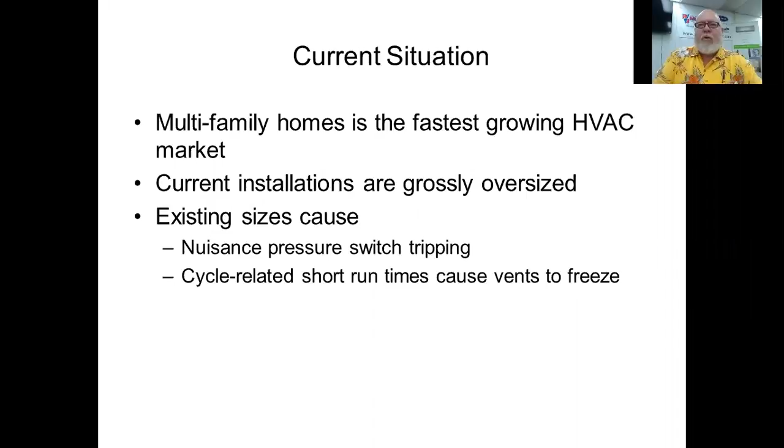But we discovered that the 40,000 BTU furnaces that used to be the smallest ones in our product line are actually much too large for these applications. In some instances, they're more than twice the capacity that is needed to effectively heat the homes at design temperatures outdoors. So we get nuisance pressure tripping and short run times due to the oversizing issue.

So Carrier has developed and now is producing a low capacity gas furnace, they call it. The furnace has a 26,000 BTU input and it comes in two models. The less expensive version is a 1/4 horse PSC motor on the blower. And the more expensive version, which also is electrically a little more efficient, is a 1/3 horsepower with the multi-tap ECM blower motor. That's the one I'm sure you'll recall that has the 24-volt input to determine the RPM of the blower motor. And these are intended to serve for new construction in apartments and multifamily dwellings and also the growing popularity of low-energy homes.

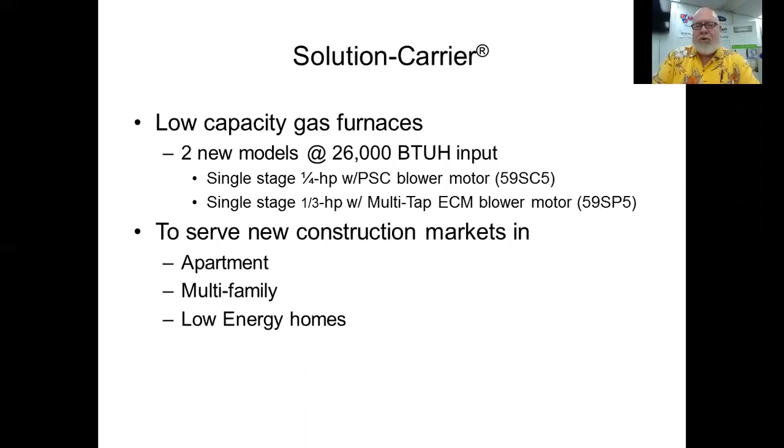So these are the specifications on the furnaces. You'll notice the one on the left has the 1/4 horse PSC blower motor, and the one on the right has the multi-tap ECM. They both have 2 burners, 2 heat exchanger cells, and 13,000 BTUs per burner. The cabinet width is the exact same width as our current 40,000 BTU furnace, and the height is exactly the same also. So the footprint is the same.

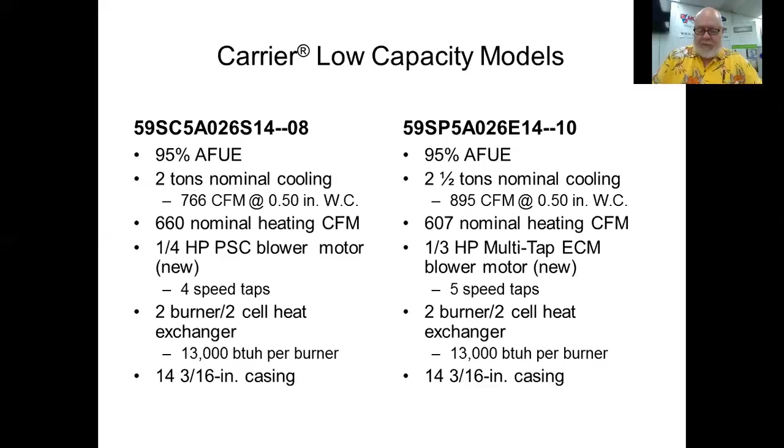The Payne version is identical to the Carrier PSC version. It's just branded differently and as you know, marketed differently.

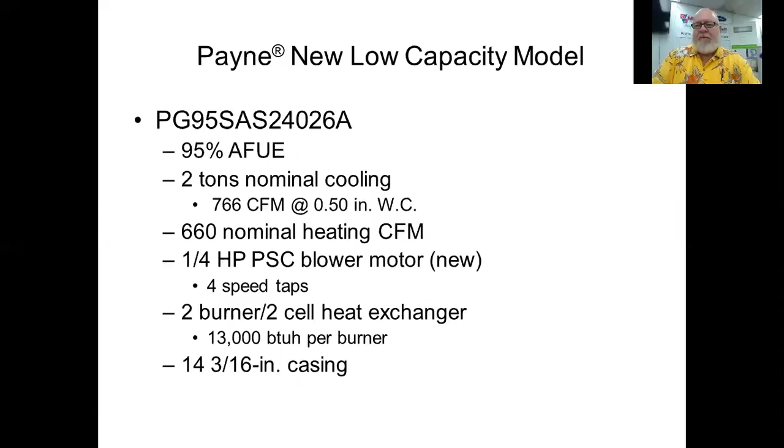Now the major differences from the current 40,000 BTU unit is they didn't just downgrade the burners. The Inducer has a different design. They've added an intake choke on it. We'll see that in the upcoming slides. The pressure switches have slightly different set points, and we're lowering the manifold gas pressures in both natural and LP with dedicated conversion kits.

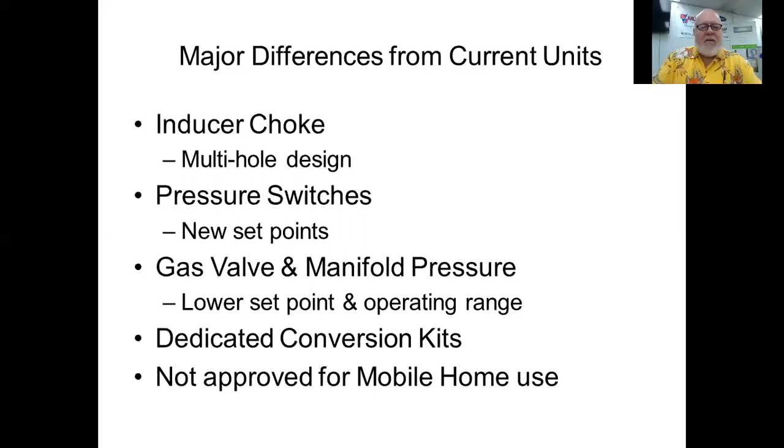Notice the inlet choke. The Inducer you're used to looking at has 1 large round hole. Now we've downsized it so there's only 3 holes to regulate the volume of flue gas that the Inducer will handle. Those are 3/8 inch ID holes in the choke. If you need to buy a replacement Inducer, it comes as a single stage unit and it includes the choke. You don't have to alter it in any way.

Now the outlet choke issue, you may remember the 40,000 furnace. If you have a flue vent that is 10 equivalent feet or less, you need to install the outlet choke. That does not apply to this furnace, so don't attempt to do that.

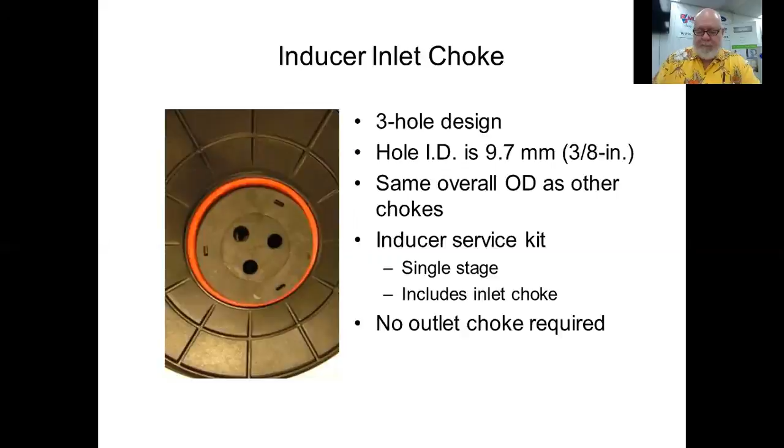The pressure switches, although they look identical to the ones on the larger furnaces in the product line, they're different. They have different make and break points, so don't confuse them. As you may be well aware, for example, the one facing the rear, which is the housing pressure switch, on the larger furnaces, that breaks at 0.35 inches negative. This one breaks at negative 0.10. That essentially is the point at which the furnace, if allowed to run in that condition long enough, will start to make carbon monoxide. So the research has shown us what break point is appropriate.

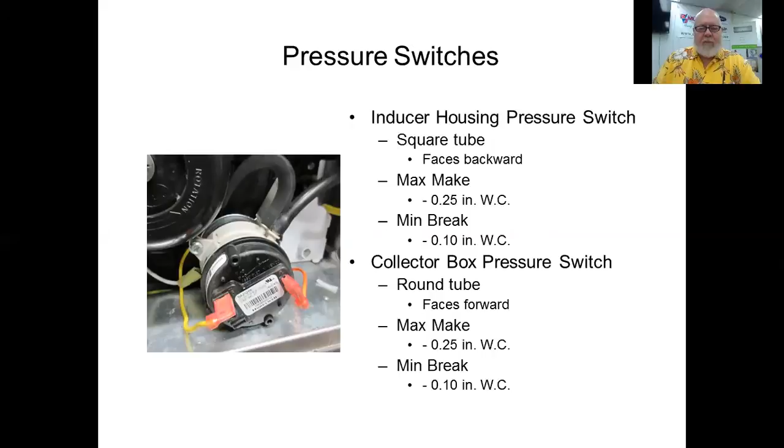The collector box pressure switch is the one in the front with the round tube, and that also has a lower break point than the previous ones you're used to. Here's another large difference is the gas valve has a special regulator, and you can tell by the green label you'll see on it. It's staring right at you when you take the door off the unit. And it also conveniently located has a nominal 1.5 inches water column manifold pressure setting that you should expect. Again, starting these units up, I would strongly recommend that you verify that with your manometer before you walk away from the job.

The furnace also uses a lower propane manifold pressure instead of 11 inches that we're used to. This furnace requires 5.5 inches water column. And again, we're expecting you will verify that before you leave the job.

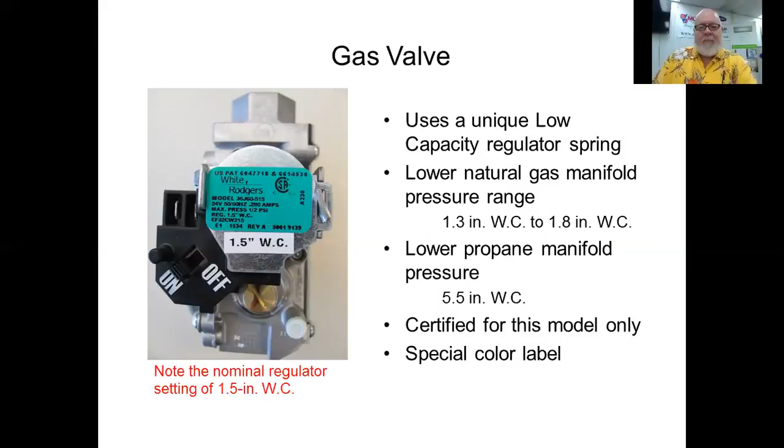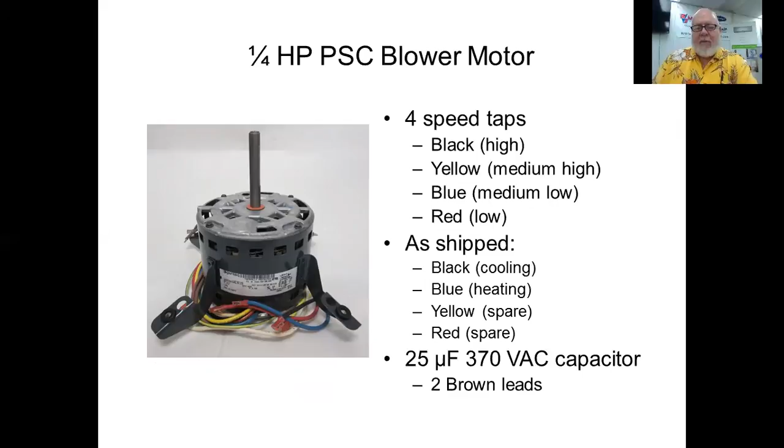The blower motor, this is a familiar device, the 1/4 horse PSC motor. It's 4 speeds. The speed taps are denoted by the colors of the wires. And as the furnace is shipped, the factory puts the black high-speed tap on the cooling speed, and the heating speed utilizes blue, which is medium-low. It uses a 25 microfarad at 370 volt capacitor.

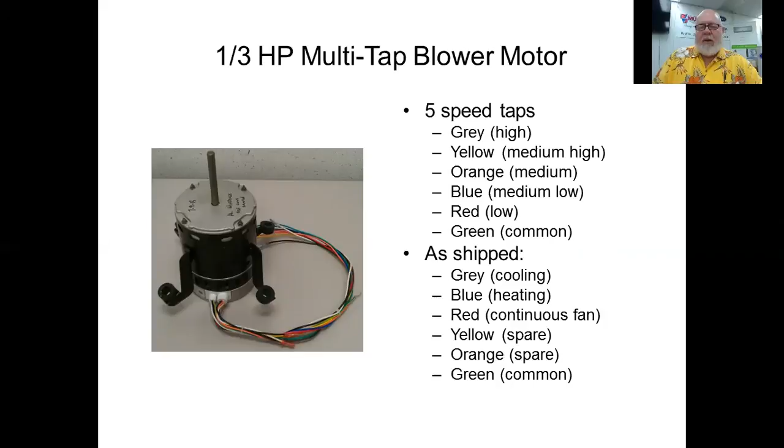The multi-tap blower has line voltage going to it at all times. There's a black and a white wire going into the module. That's line voltage. It's, again, at all times when the furnace is powered up, there's 120 volts there. And the speed taps utilize a 24 volt signal to tell the motor what speed range it's supposed to be running at. The wire speeds are denoted by the colors, and again, as shipped, gray is cooling and blue is heating and red is continuous fan.

Venting is the same as the larger furnaces. You have 3 options. You can do it as a 2-pipe direct vent. You can do single pipe non-direct vent as long as you have enough ventilation air in the combustion space. Or you can do 2 pipes with 1 pipe vented outdoors and the other combustion air pipe terminating in a ventilated combustion air space, such as a ventilated crawl space or a ventilated attic.

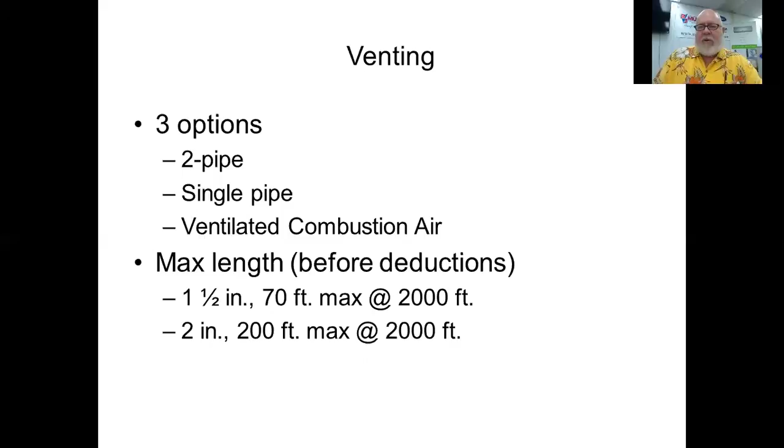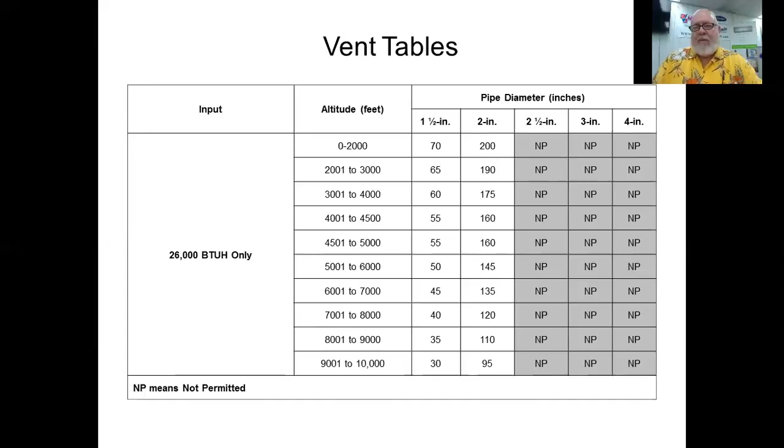The maximum length before the deductions for elbows is as listed below, and we'll look at the venting table on an upcoming slide. And here it is. You'll notice that the only 2 sizes that are allowed are 1.5 and 2 inch. That means that if you have an existing application where someone has installed 2.5 or 3 inch pipe, you'll need to rip it out and replace it with an appropriate size.

The inlet gas pressures are recommended to be the same as with the current product. We need at least 4.5 inches water column inlet pressure for natural gas. Customarily, you can expect to see a 1 inch pressure drop through a gas valve. So if you have less than 4.5 inches minimum, you'll see less than 3.5 at the manifold. Even though this one only requires a nominal 1.5 inches at the manifold, we still want to see that 4.5 inches at the inlet. Manifold pressure, again for LP at 5.5 inches, we would still like to see an inlet pressure of 12 inches.

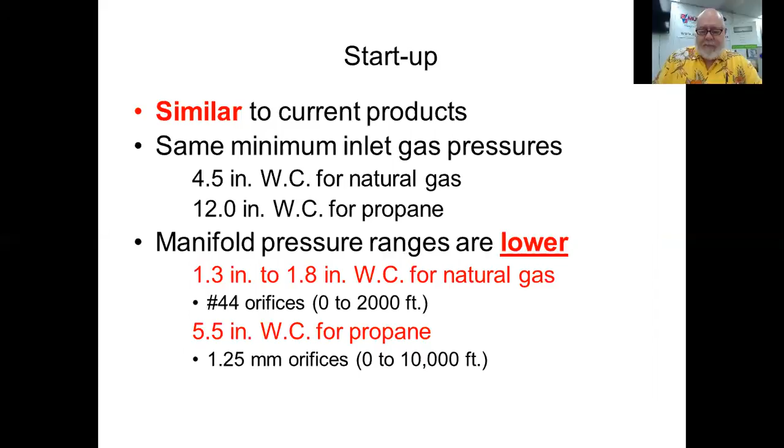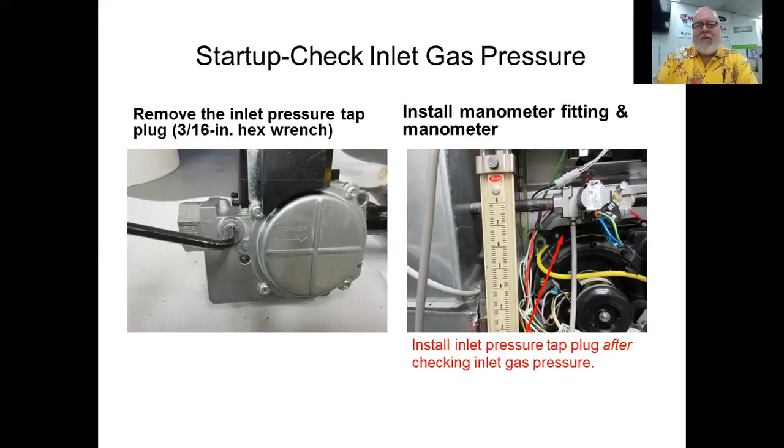So this is the procedure. You connect the manometer to the inlet pressure tap, turn the gas supply on, and verify that your pressure is above 4.5 inches. Remove your thermostat wire and jumper R to W. After ignition, monitor the inlet pressure to make sure it doesn't drop below the required 4.5 inches. And then only run it about a minute. After checking the inlet pressure, then you can remove the jumper, turn the gas supply valve off, remove the manometer, and replace the little plug in the gas valve.

Then you move to the manifold side. The pressure tap, as I'm sure you're aware if you've been working on Carrier furnaces, is inconveniently located behind the outlet manifold section on the gas valve. In the picture on the left, they're using an angled hex key. I suggest getting a 3/16 straight Allen key with a 1/4 inch hex on the end, and then you can use your refrigeration service wrench. It's way faster and a lot easier. So install the manometer fitting and the manometer on the outlet.

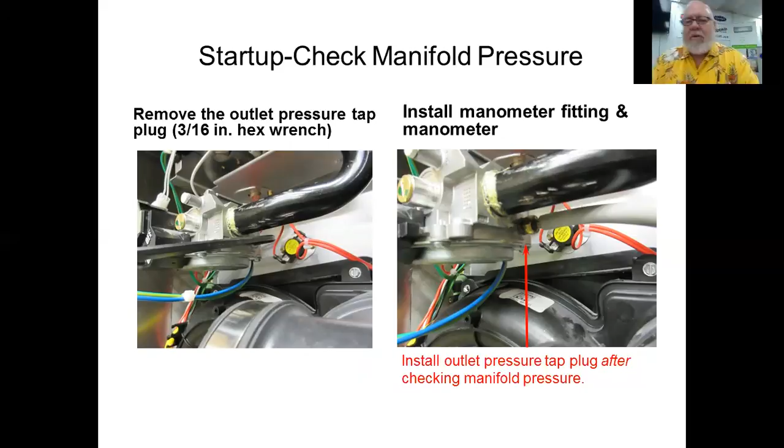And to adjust the pressure, after you jumper R to W and the burner ignites and stabilizes, then you can adjust the manifold pressure. The allowable range, of course, is 1.3 to 1.8 inches. They allow for differences in the heat content of the gas, but it's probably a good policy to set that to the mid-range, which is about 1.5 inches.

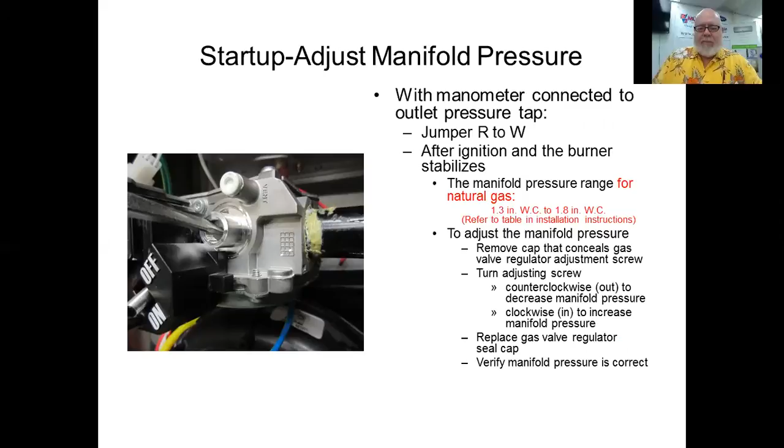And after you've made the adjustment with the screwdriver, briefly cover the regulator with your thumb to make sure that the regulator pressure is not affected by the atmosphere. And if everything is the way you've set it up, then you can replace the cap on the regulator stem. At that point, you can be sure that the manifold pressure is correct.

After you've adjusted the pressure, remove the jumper, turn the gas valve off, and put the gas shut off to the furnace in the off position. Remove the manometer and replace the plug. Put your R wire back on the thermostat and set it to call for heat. It's probably important to make sure that both the inlet and the outlet pressure taps you've just had out of the gas valve are not leaking, and make sure that the furnace ignites and the flame burns correctly.

Now this brings us to temperature rise, which is a sadly neglected item, but it's important. So remember that when you check the temperature rise, you need to have the blower door on, because it's critically important that the ductwork be involved in this calculation. So check the temperature rise range noted on the rating plate. Inside the service door on the furnace, there's a card that, when you open it up, has this label on it. And you can find the certified allowable temperature rise range published on that card.

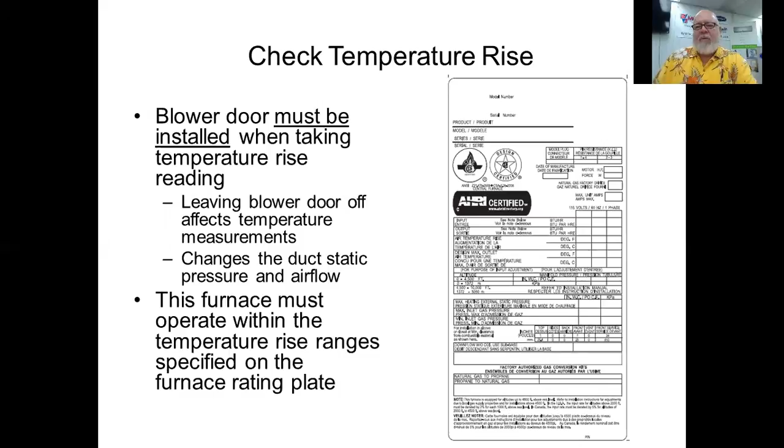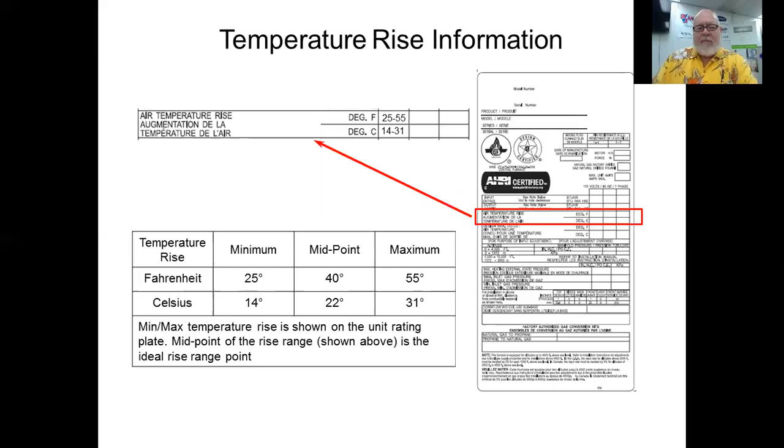For example, you're allowed to have a 25 to 55 degree Fahrenheit temperature rise on this appliance. Generally shooting for the midpoint is best, but anywhere within that range is allowable. So in order to determine the temperature rise, you need to place thermometers in the return and the supply duct. If you only have one thermometer, then I would suggest taking the return air temperature while the furnace warms up. You're going to probably need to run it about 10 minutes for the heat exchanger temperature to stabilize.

So if you have a low mass thermistor type thermometer, you can snake it in through the door seam or something of that nature and get a temperature in the blower section of the furnace. So you're getting a blower suction temperature. That would be your return temperature. And then when things stabilize, you can take a supply temperature reading, and we suggest you do it in the supply trunk far enough away from the plenum that you're out of line of sight from the heat exchanger, because you don't want radiant energy to affect the reading.

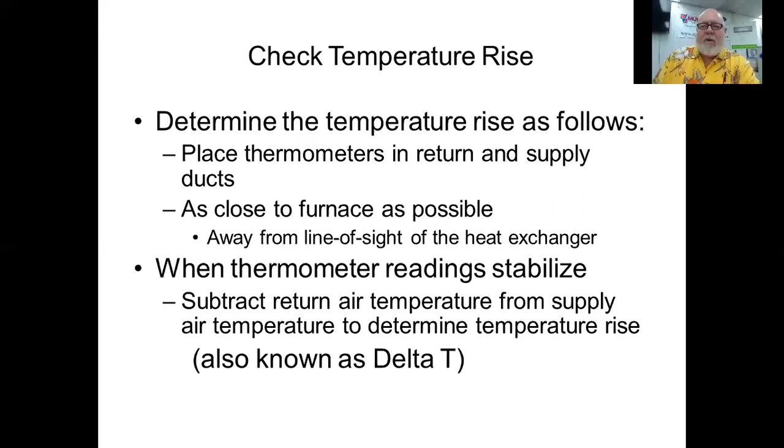So once you have these two temperatures, you subtract the return air from the supply air, and that is your temperature rise, also known as delta T. Delta is the term mathematicians use for difference, which is the product of a subtraction.

To adjust the temperature rise, if you've got too much of a temperature rise, it means you're not moving enough air. So to reduce that, you would increase the blower speed. To decrease the blower speed, you would increase the temperature rise. And you change these speeds at the control board. You would simply swap out the colored wire on the heating tap and go to a slower speed if you want to slow the blower down.

Now, there's a calculation you can make here which is very helpful. So this formula on the bottom of the slide: CFM equals Btu output divided by the product of delta T times 1.08. Once you have your delta T, multiply that value by 1.08. Then you go to the rating plate on the furnace and look for the BTU input and multiply that by 0.95. It's a 95% furnace. So to save you the math, this 26,000 BTU furnace has essentially a 25,000 BTU output. So if you divide 25,000 by the product of delta T times 1.08, that yields the airflow in cubic feet per minute. Sounds complicated, but if you took elementary algebra in high school, it's not.

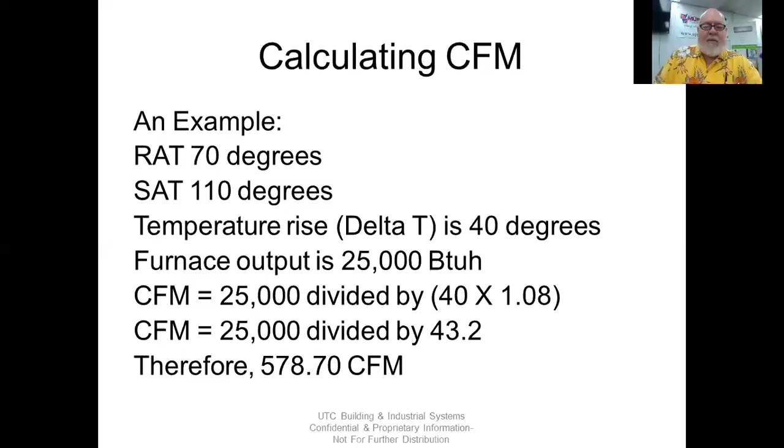Now, in the installation manual is a fan table. The fan table will tell you what CFM each speed will yield when matched with a certain static pressure. So what you can do is, once you've calculated CFM, see where it lands on this chart. So for example, if we have the yellow speed tap on the heating output of the control board, and you have just measured 578 CFM, the closest approximation to that is the 585 CFM, which is under the 0.6 inches static pressure column.

That means that for all practical purposes, the total external static pressure that blower is encountering is about 0.6 of an inch water column. And that if you needed more or less CFM, you could change the heating tap to either the black or the orange or whatever in order to achieve the airflow that you need. However, in the example that we've chosen, the 40 degrees delta T is right in the middle of the allowable temperature range, and it falls in a fairly decent static pressure category in this fan table. So that heating speed is pretty good.

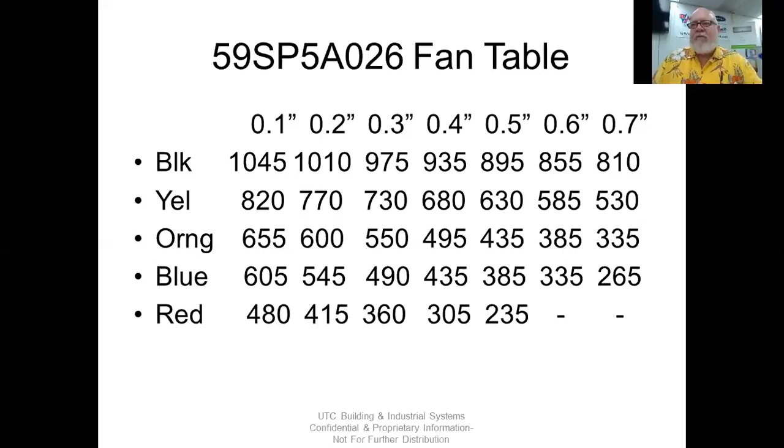So if your CFM calculation yields a static pressure above 0.5, 0.6, something like that, you need to go and investigate why. Are they using one of those 1 inch thick pleated high efficiency filters from the hardware store? Throw that piece of junk away and put in an appropriate filter. That doesn't have enough surface area. Pressure drop is horrendous. So look for closed dampers, blocked returns, things like that. You know what to do.

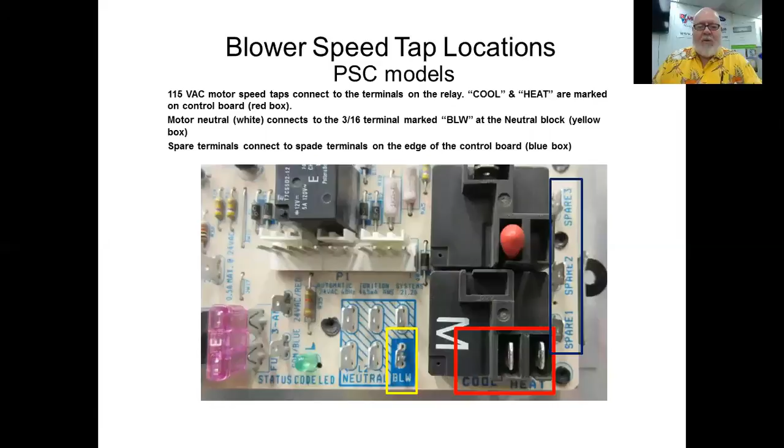The blower speed tap locations for the PSC motors, there's a cooling relay and a heating relay on the board, as you can see on the bottom right-hand corner of the board. So you would choose which color goes in the cool and what color goes in the heat by looking at the fan table. This is a photo of the board. That's the lower right-hand corner, and you've got the heating tap and the cooling tap. You'll see the spares outlined in blue there on the bottom. The white wire, which is your 120 volt common, goes on the yellow outline box, and it's labeled as such.

The ECM motor uses a similar arrangement, although rather than giving you 120 volt outputs for the blower speeds, it gives you 24 volt outputs. The green wire is a common, goes on 24 volt COM down at the bottom. And then the other speeds are mounted on the heat, cool fan and the two spares. The line voltage wires, the black and white, go to the L2 neutral and the blower L1.

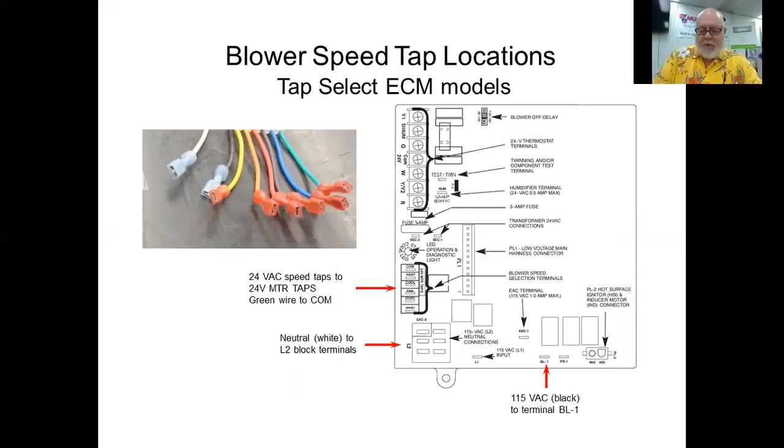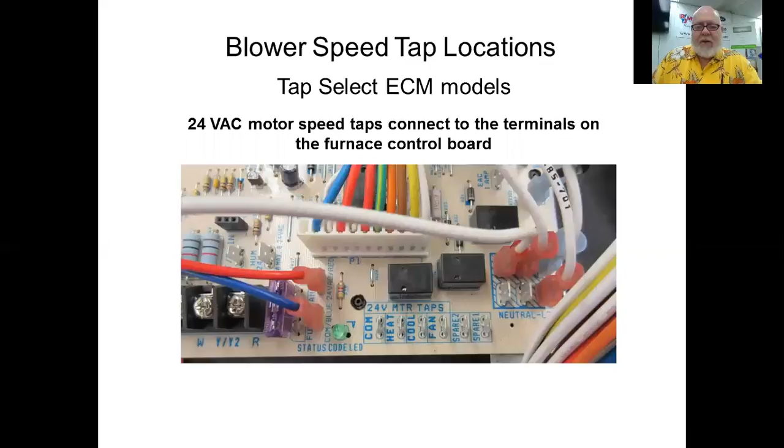This is a photo of the board, and you can very clearly see the 24 volt motor taps. Common is the one on the left, that would be your green wire, and the other colored wires are installed on the heat, cool, fan and the spare one and the spare two. The 115 volt motor lead connects to BL-1, and the motor neutral connects to neutral L2.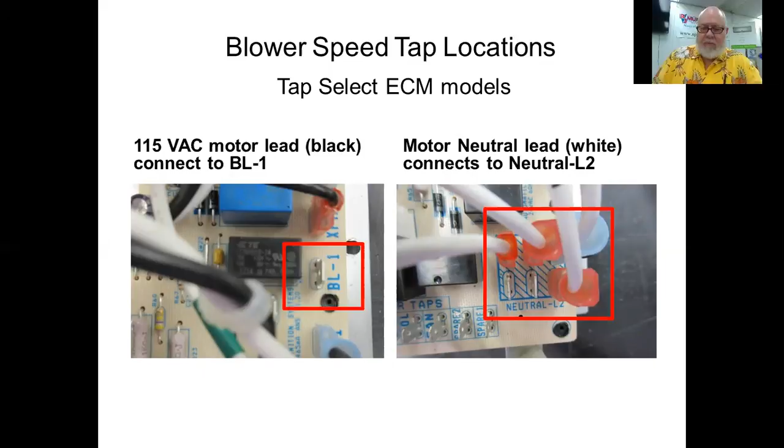Other tasks as you finish up the installation: making sure the filter's installed. We talked about that briefly a minute ago. Is the condensate drain connected? Remember, our best practice now for the condensate drain on the furnace is when the furnace condensate drain leaves the furnace jacket, instead of using an elbow to go straight down, we recommend you use a T and leave the top of the T open. It's called a standpipe. Especially if there's air conditioning on the job, we don't want to have the air conditioner drain, when the blower is on, pressurizing the furnace condensate drain. You'll get a code 31 and it'll drive you nuts.

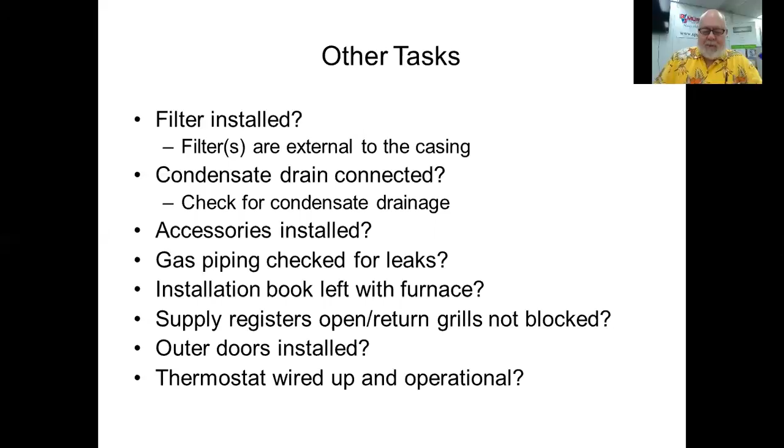Are the accessories installed? Have you checked the gas piping for leaks? Please leave the installation manual with the furnace. Service technicians will be very appreciative of that fact. Are the supply registers open, return grills not blocked, and are all the balancing dampers in the appropriate position? The outer doors installed and the thermostat set up and properly adjusted.

Now, if we need to convert this thing to propane, this is the kit number. It's a dedicated kit for this furnace only. It's not applicable to any other kit, and no other kit will work on this furnace. It comes with 1.25 millimeter orifices, which is similar to our other products, but

here's the difference. This kit comes with a spring, although you don't need to change the spring in this gas valve. There's one in the kit. Why? Because Carrier was afraid that people would just change the spring without thinking about it, and then perhaps read that the spring change was not necessary in the installation instructions. And meanwhile, the original spring got lost or broken or stepped on or something like that. So I suppose it's a preemptive attempt on the manufacturer's part to spare you some confusion in the field.

Mixer screws. On our current product, since 2011, we've been used to installing the mixer screws in the burners, and this furnace is no different. So you also have to install the low gas pressure switch, which goes on the inlet side of the gas valve. It comes with all of the brass fittings and wires and the instructions necessary for you to install that device and wire it properly.

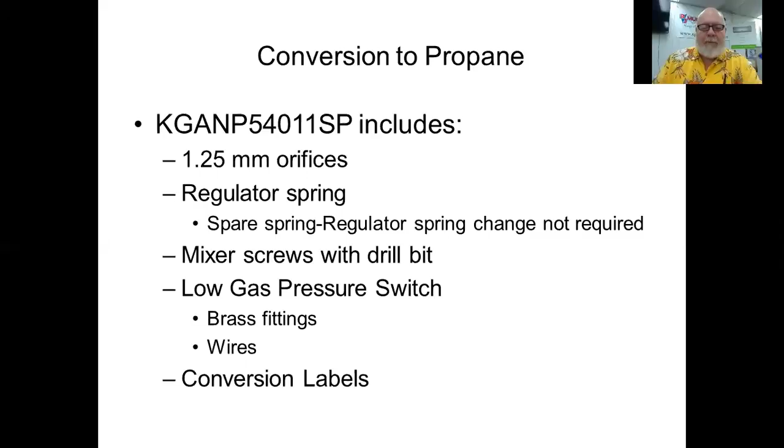Step one would be to remove the manifold. Make sure you use a backup wrench on the gas valve. You don't want to either bend the manifold or the mounting. So disconnect the gas pipe from the valve and remove the pipe from the furnace casing. You can take the manifold and the gas valve out in one piece. You need to disconnect the gas valve wires, the hot surface igniter, and the flame sensor. Remove the 4 screws and pull the manifold assembly away.

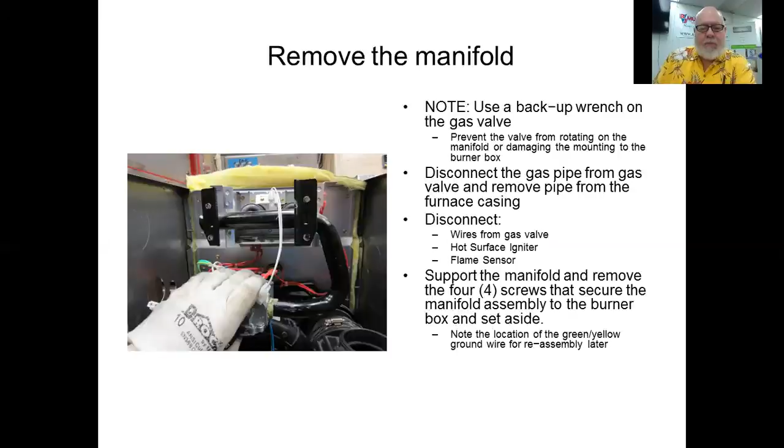Note the location of that green and yellow striped ground wire, because that has to go back on the burner tray. We'll talk about that in a little bit. You know, flame rectification is the issue. You slide the one-piece burner assembly out. There's slides on both sides of the burner box. Remove the flame sensor from the burner assembly.

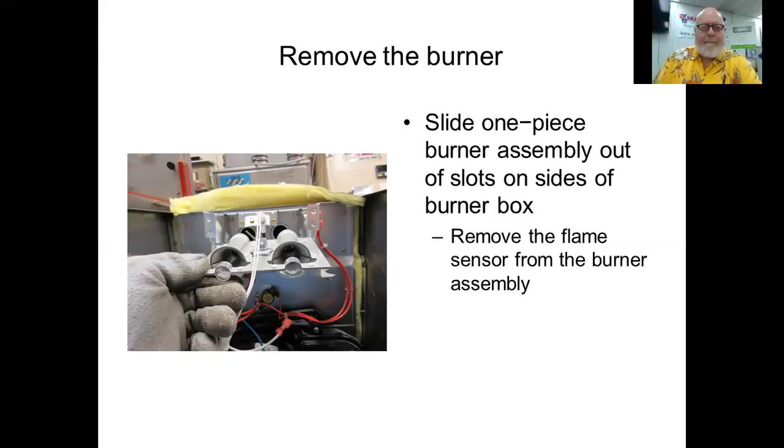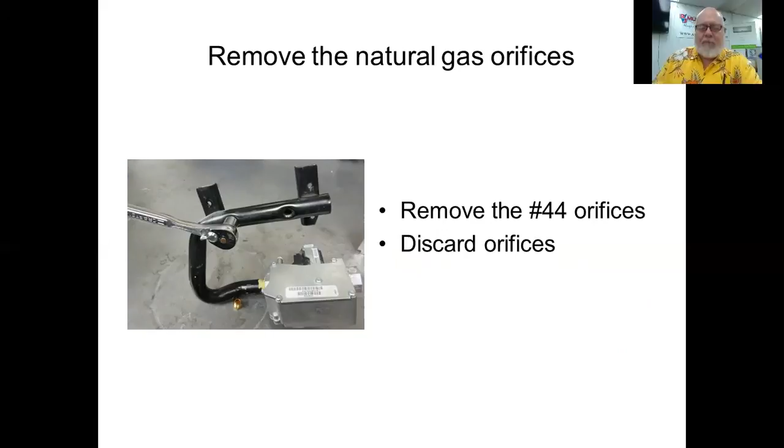Take the orifices out and toss them away. If this is to be converted back to natural gas, there's a natural gas conversion kit, so don't just toss them out. It's a good idea to look at the orifices to make sure that there's no chips or debris in them before you install them. Do not use Teflon tape or pipe dope. Finger tighten them to make sure that they're not cross-threaded, and then tighten them with a wrench or a socket. Don't reinstall the manifold yet. We've got more work to do on it.

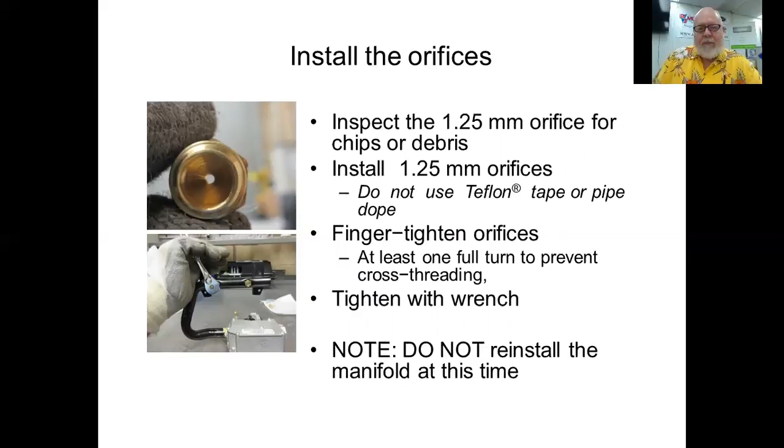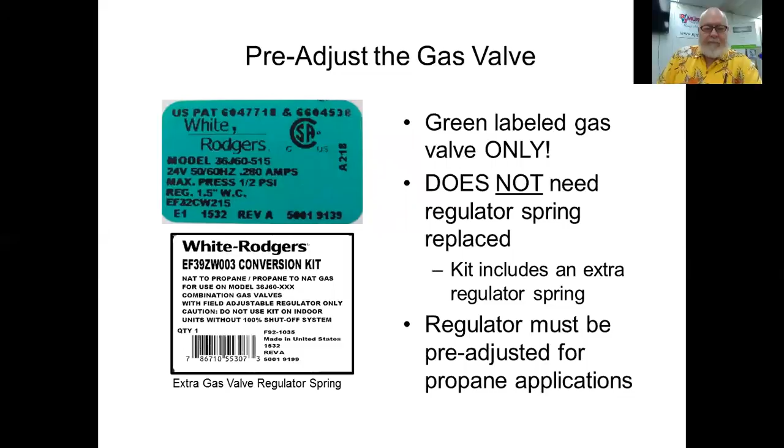Pre-adjust the gas valve. These instructions, again, are for the green label gas valve only. It does not need to have the regulator spring replaced, but if you did it with the spring in the kit, no harm, no foul, it's the same spring. And then the regulator needs to be pre-adjusted, just as with the other units, but it's a different number of revolutions. So remove the brass cap, turn the regulator adjustment clockwise 1.5 turns. This will get the valve closer to the propane set point. Now, if the regulator spring is removed, reinstall the spring and the adjustment screw, and then turn it in 11.5 turns to get to that same pre-adjustment set point. Don't install the regulator seal cap quite yet.

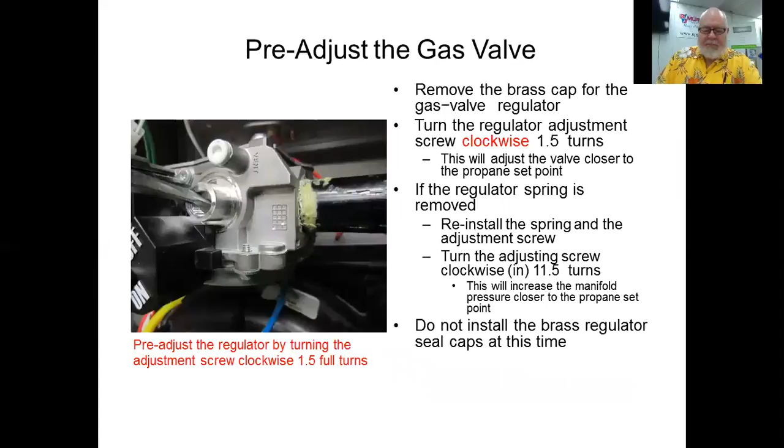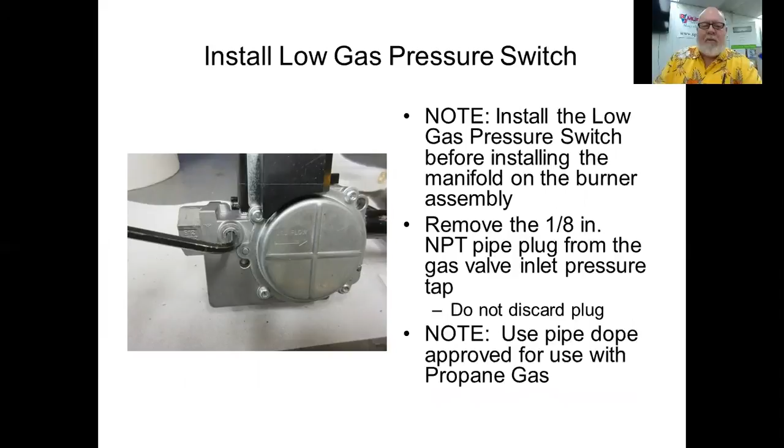We need to do the LP inlet gas pressure test as we did on the previous slide. The kit contains the low pressure gas switch and all the necessary fittings and wires. This device opens at about 7.2 inches water column and closes at about 10.2 inches. And remember, this is wired in series with the pressure switches down on the inducer.

So if you have an LP application, and you get a code 31 on that furnace, which is a pressure switch opening up, first thing you check is whether the inlet gas pressure is adequate, because that can be the cause. Don't assume you've got an issue with the venting or the inducer or the pressure switches themselves on an LP application until you verify the inlet pressure and make sure that it's not this switch which is causing the code 31.

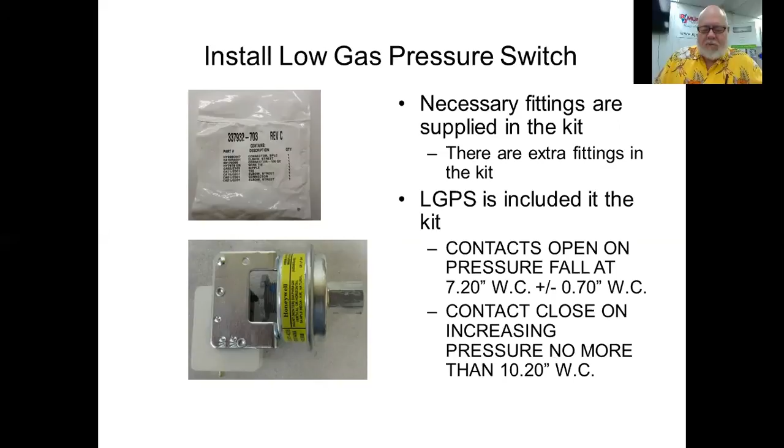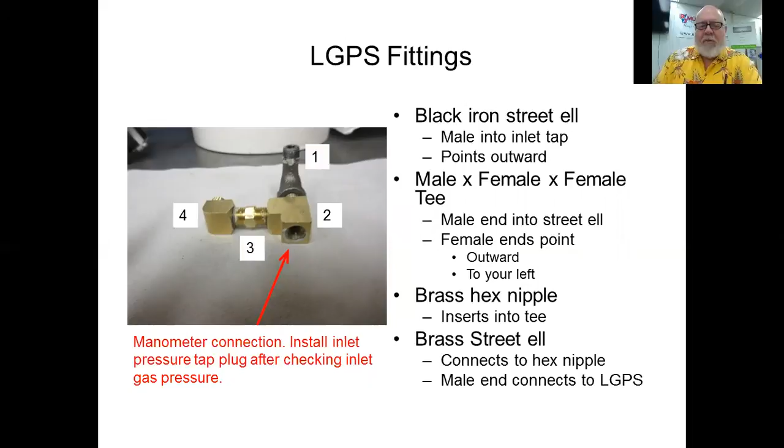So if you assemble the fittings in the kit in this arrangement, you give yourself the most convenient method for verifying the inlet pressure, quick and easy. Because see where the red arrow is pointing, that pressure tap will be staring you in the face when you take the door off the furnace, and the pressure switch will be off the rear of the elbow to the left. So it's much more convenient when you do it this way.

As you can see from the picture on the left, all you have to do is take the little hex plug out and put your manometer spud in that point, and you don't have to go through any gyrations to do it.

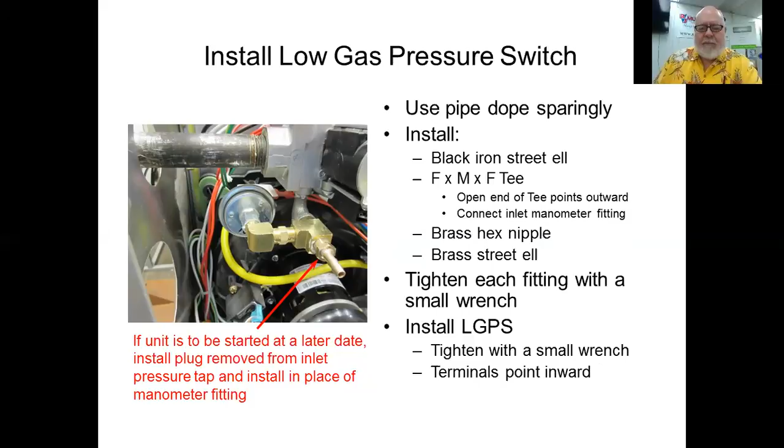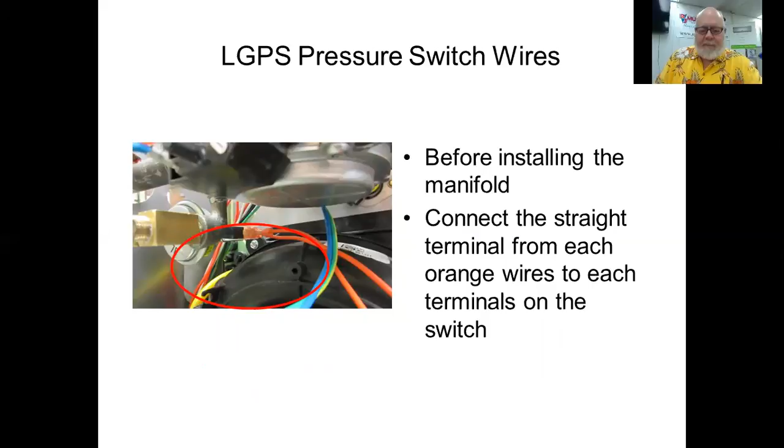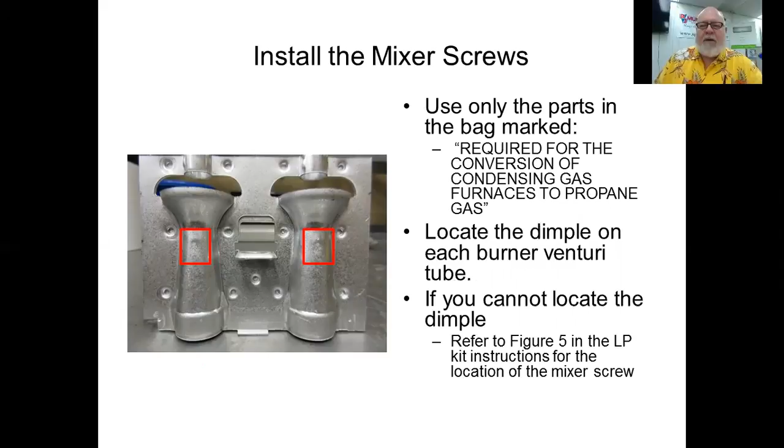Here's the spot for the mixer screws. There's an indentation. It might be very faint, but that's the spot where it needs to be drilled, and it's essentially on the underside of the burner tray. Locate the dimple, and if you can't find it, figure 5 in the LP kit instructions gives you exact measurements to locate that spot. What I would suggest then is mark the spot with a Sharpie or something like that. Use a center punch or an awl to make a slight dimple, and then drill the hole.

Use the mixer screws in the bag. Do not substitute any other screws, because the length and the diameter of the screws are important. You may remember in the LP kits for the larger furnaces, there's 2 bags. There's one for the 80% furnaces and one for the 90% furnaces. And you will notice that the drill bits and the screws are different size. They're not to be confused. So for this one, use the ones that come with this kit. Don't substitute anything else thinking it's good enough. It's not. It's going to be a problem.

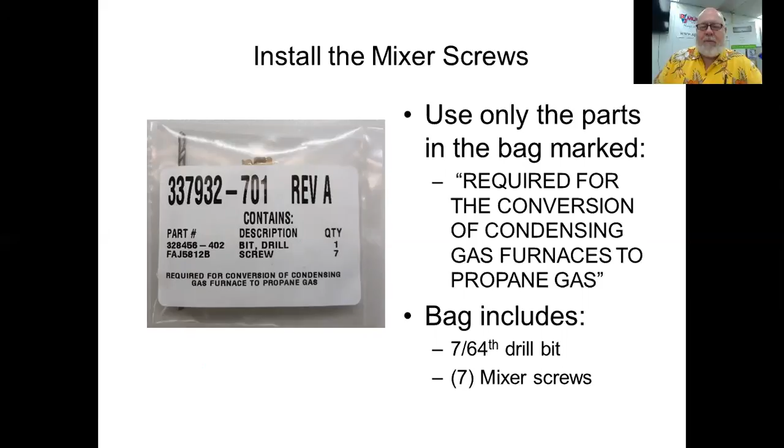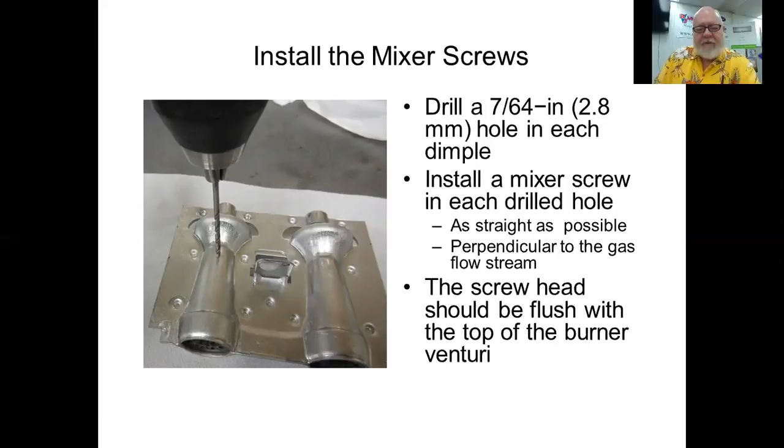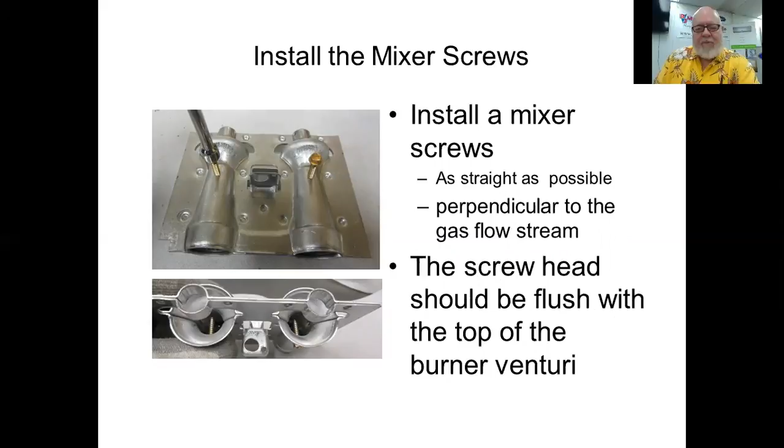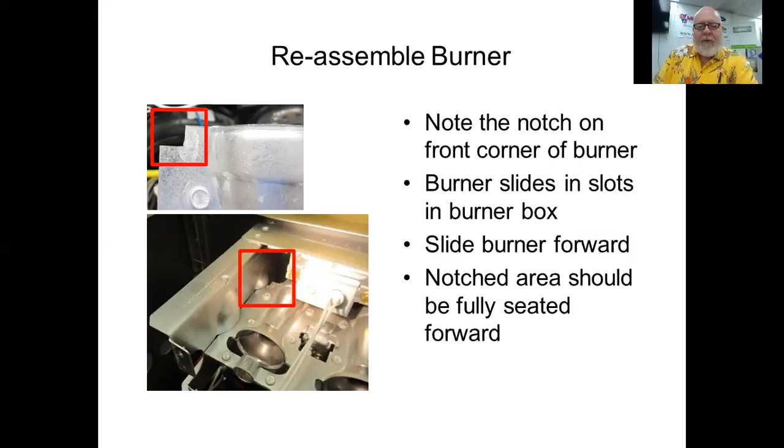Reassemble the burner. You'll notice that as you put it in, there's a notch on the front corner of the burner, and the burner slides into slots on the box. You slide it forward, and the notched area should be seated fully forward. When you install the manifold, make sure that the orifices are captured by the burner mounting rings. The burner mounting rings are made out of sheet metal, and they can be bent if you're careless. So be careful when you slide them in there that they're not egged out or bent.

The problem with that is that those burner mounting rings ensure that the stream of gas coming from the orifice is going right down the exact middle of the burner venturi, which is where it has to go. The gas is then going to strike the mixer screw, which causes it to start to tumble, and it mixes better with the oxygen when it gets to the turbulator at the end.

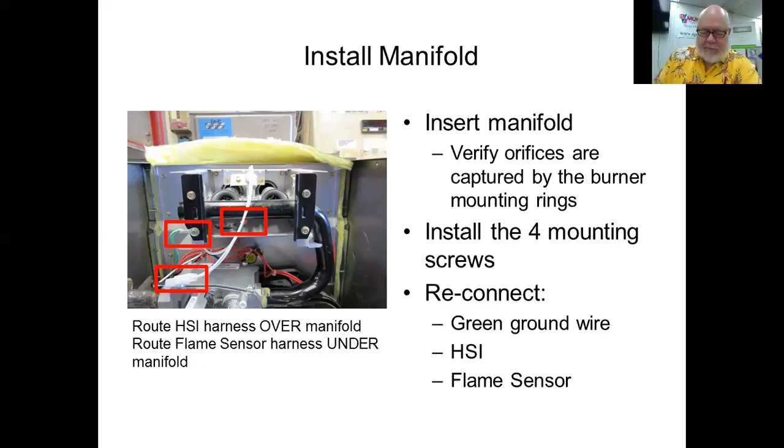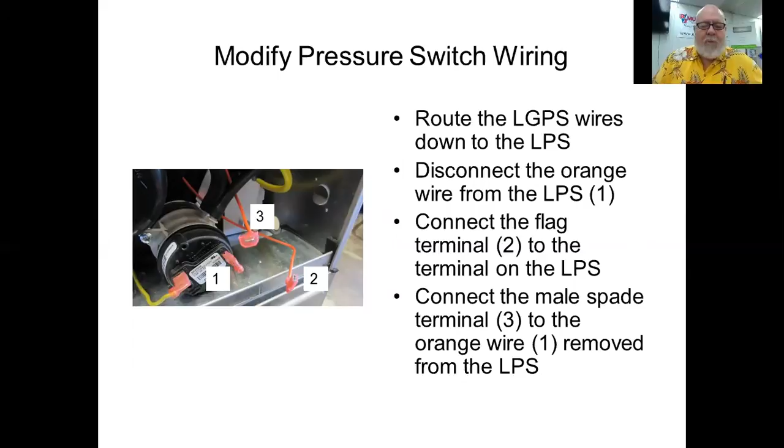Finish the LGPS wiring down at the low pressure switch. Disconnect the orange wire from the low pressure switch, number 1 in the front. Connect the flag terminal 2 to the terminal on the low pressure switch, and connect the male spade terminal 3 to the orange wire 1 removed from the LPS. This is really pretty simple.

This is how it looks when it's done. So essentially, you're just taking one wire off of the pressure switch. You're routing it over through the low gas inlet pressure switch and then back to the original spot. So now those two switches are in series.

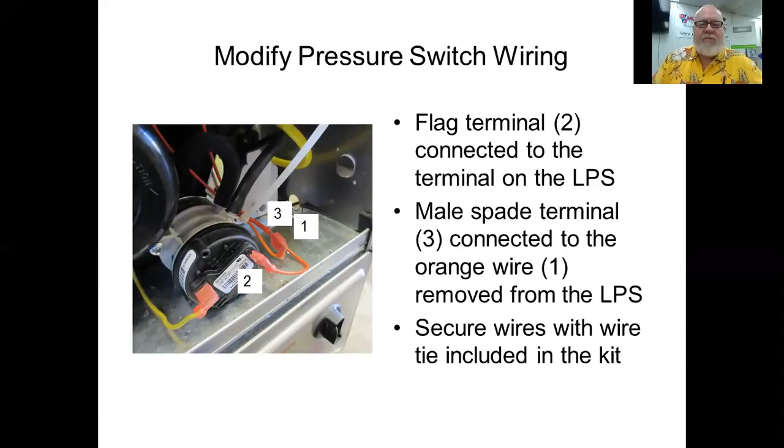With the manometer connected to the inlet pressure tap, you want to turn the gas supply on. Verify the inlet gas pressure is above 12 inches. Again, remember, there is a maximum limit also. You don't want to go above 13.5 inches. Essentially, anything above 1/2 psi or 13.5 inches can theoretically damage the gas valve.

So, especially if this is a new installation and someone is pressure testing the gas piping, we need to make sure that the gas valves are never exposed to that test pressure if it's above 13.5 inches.

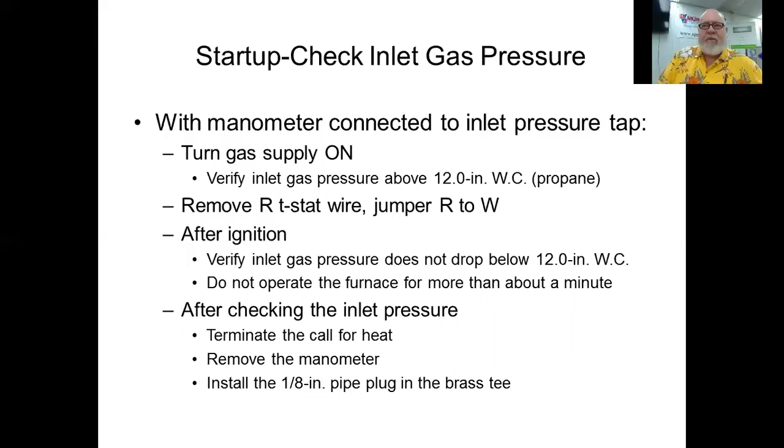Remove the thermostat wire, jumper R to W, and make sure that your inlet gas pressure doesn't drop below 12 inches. And again, don't operate it for more than about a minute. And then terminate the call for heat. Remove the manometer and replace the pressure tap plug. And that's the spot at which you would do it.

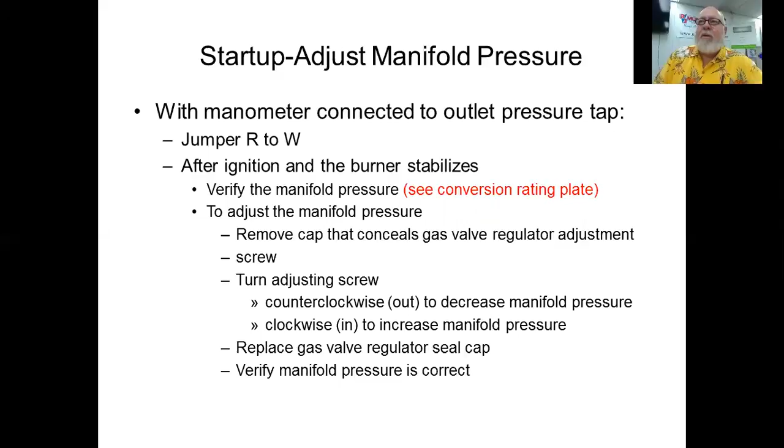Go to the manifold pressure as we did in the previous slides. Install the tap on the outlet of the gas valve, jumper R to W, and adjust your manifold pressure after the burner stabilizes. And again, we want to go to 5.5 inches water column. And once you're done with the adjustment, plug the regulator with your thumb to make sure that it doesn't change. And then if you're good to go, you can replace the seal cap and turn the unit off and remove your measuring equipment. Make sure that you put the plug back in and we don't have any leaks.

You remove the jumper, remove the manometer, install the pipe plug in, put the thermostat wire back on, turn it on, make sure we don't have any leaks. Make sure that it ignites promptly and smoothly and stabilizes. From the time the gas valve is powered up, there's a 5-second window for the flame sensor on the other side of the burner to recognize the flame rectification. So if we have delayed ignition due to a misalignment or a pressure issue, that will cause a flame failure code.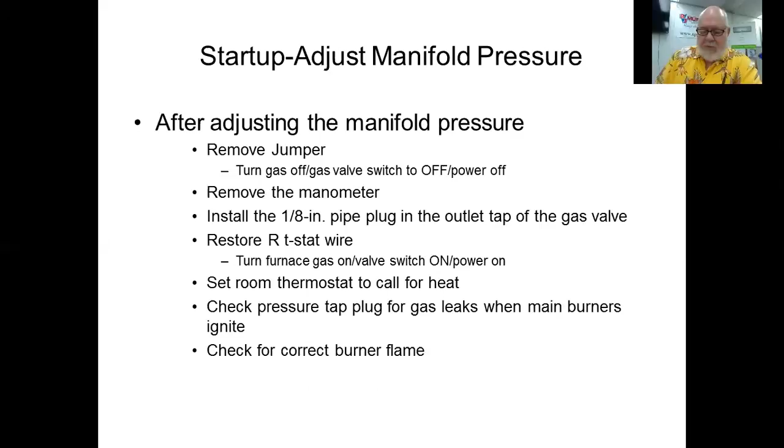Adjust the temperature rise as we did with the natural gas. The temperature rise range will be the same. If you need to reduce your temperature rise, you can increase blower speed. If you have to increase temperature rise, you can decrease blower speed.

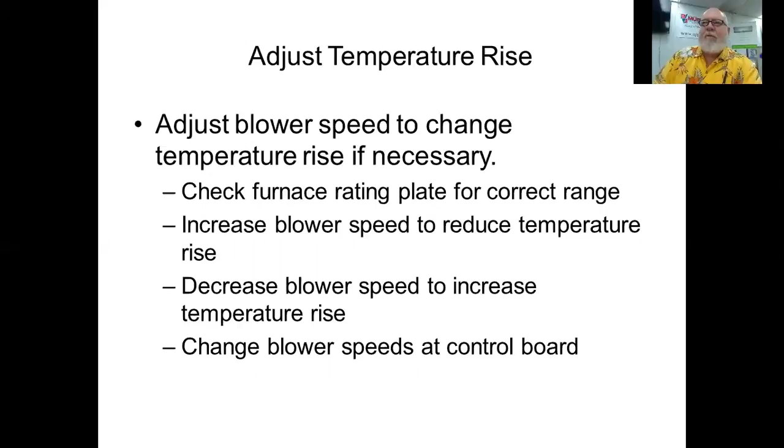Here's an important point. I get a lot of calls by guys working on LP equipment, and they don't know what orifice is supposed to be in it, and they don't know what manifold pressure they're supposed to be looking for, because for one reason or another, this conversion label is nowhere to be found on the furnace. So I know it sounds stupid and legalistic for me to be harping about this, but you need to put these labels on the appliance. Number one, it's code. Number two, the next guy down the steps into the basement who has to work on this stuff needs this information if he's going to do his job.

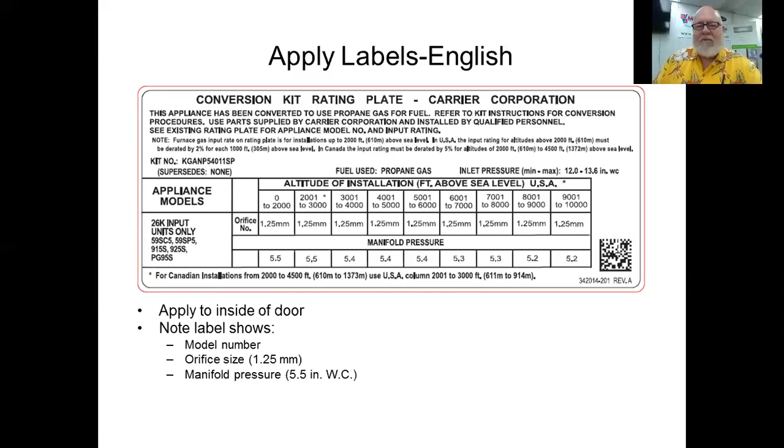Again, you're supposed to put this conversion label on, fill it out, use a Sharpie or something, and make sure that it's there. And it's helpful to put this on the gas valve. Again, this is a safety thing so that if for some reason somebody who's unfamiliar with this application stumbles into the basement to work on this thing, it's really helpful for them to know, even if there's nobody there to tell them, what fuel is being applied to this appliance. It's important.

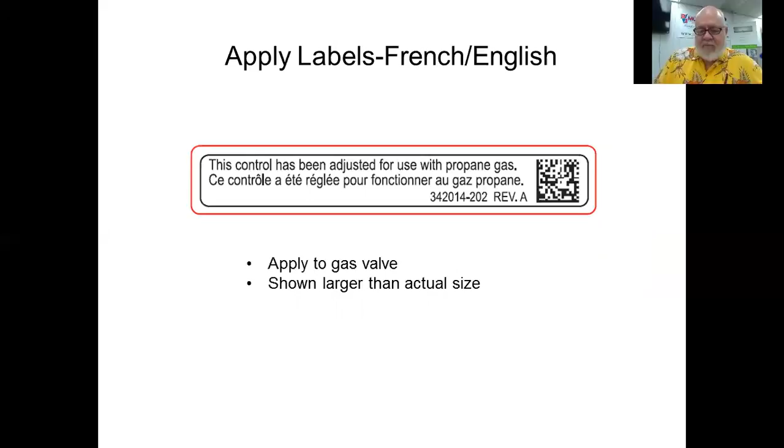So run the furnace through 2 heating cycles. Verify that your temperature rise is okay. Make sure before you leave that the gas and electric are still on. Perform any final gas leak checks you need. And make sure that any accessories, humidifiers, etc., are installed in the furnaces. The filter is properly installed. Make sure the doors are on and secure, and the thermostat's properly set.